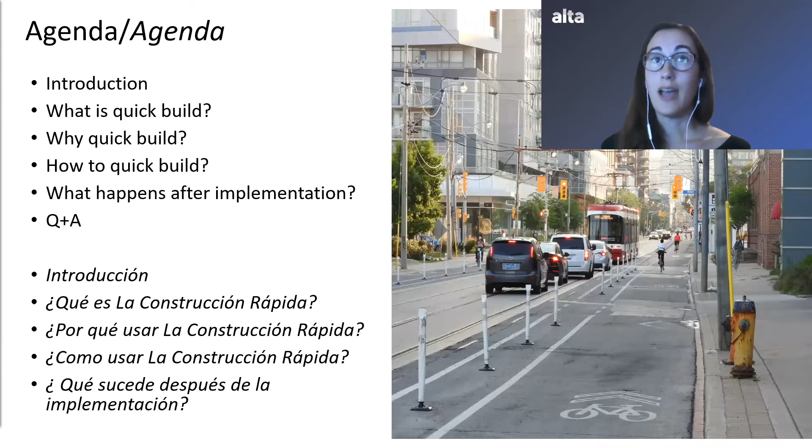Just quickly, an agenda for the meeting tonight. We'll have a quick introduction to the Quick Build Guide we'll be covering this evening. Then we'll talk about what Quick Build is, why cities are implementing it, how they're implementing it, and what happens after implementation. At the end, we'll leave some time for Q&A.

Just a brief introduction to the Quick Build Guide. ALTA Planning and Design developed this guide back in 2020, really as a response to the pandemic, when cities were looking for ways to quickly adjust their streets to create safer biking and walking routes and safe spaces for outdoor seating in the midst of the pandemic. But it's just as relevant as ever.

The Quick Build Guide includes chapters on planning, design, implementation, and maintenance of Quick Build facilities. It also includes a material selection and installation guide, as well as additional resources. There's a link here in the PowerPoint presentation. I don't know if Kristen or Devin could maybe add that to the chat so people can access the guide after this presentation.

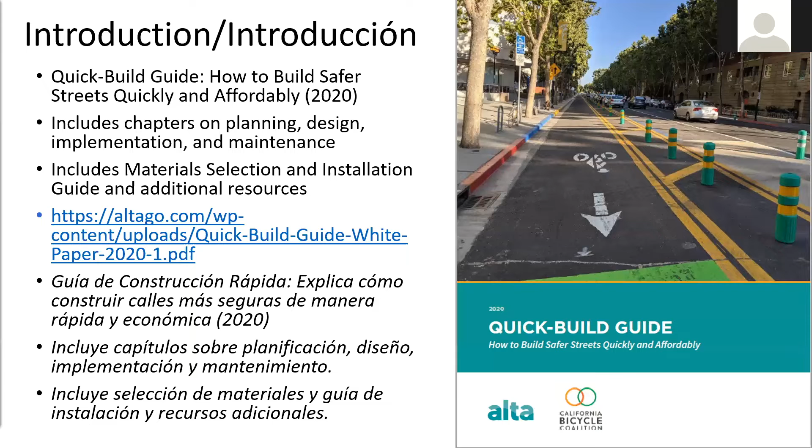So what is Quick Build? Quick Build projects install bicycle, pedestrian, or traffic safety improvements using low-cost materials that can be installed quickly. Quick Build projects are not pop-up or demonstration projects intended to be removed after just a short period of time. Once a project is accepted by the community, Quick Build projects can last for years if maintained, or they can be rebuilt using more durable materials. The key to Quick Build is about delivering projects in months rather than years.

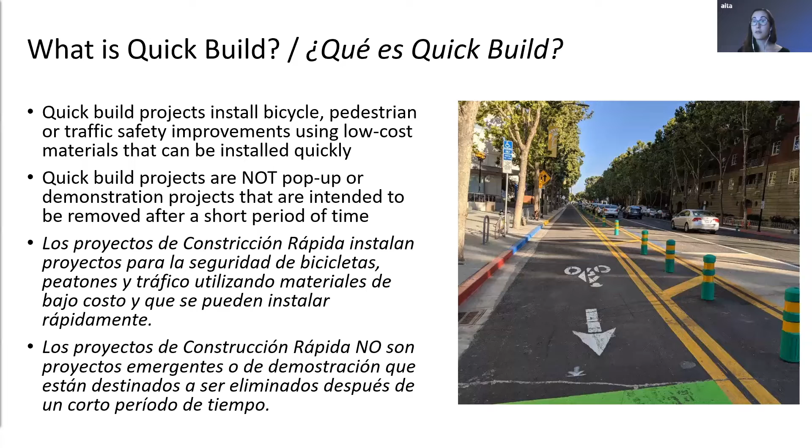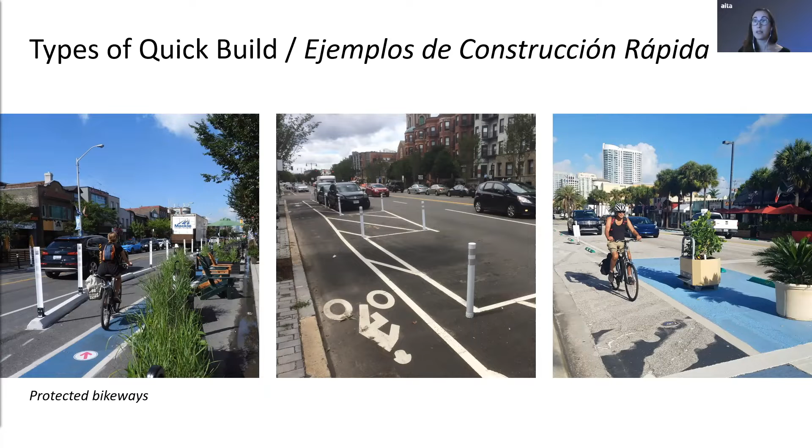There are several different types of Quick Build facilities. One is protected bikeways, which you can see in these photos here. As you can see, there's a range of materials that can be used to create these bikeways, which we'll cover a little bit later in the presentation.

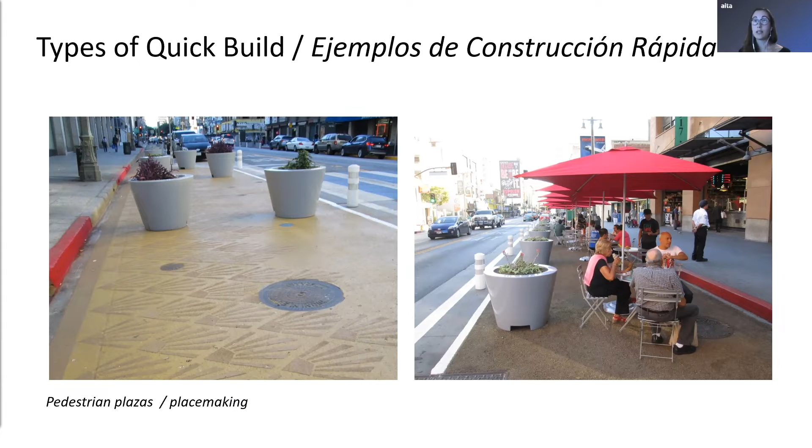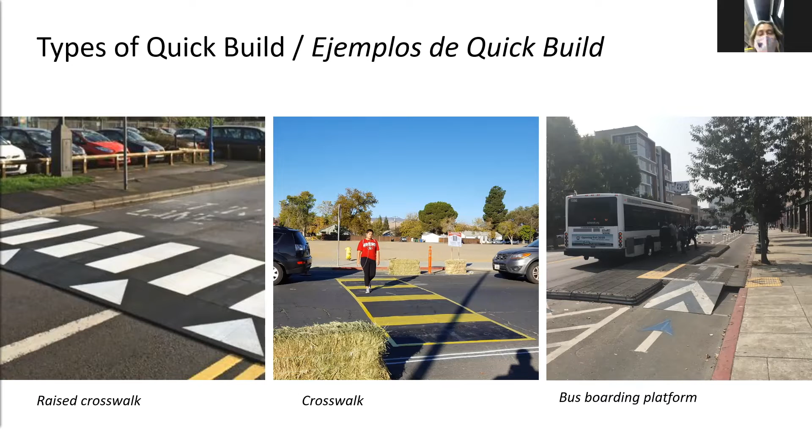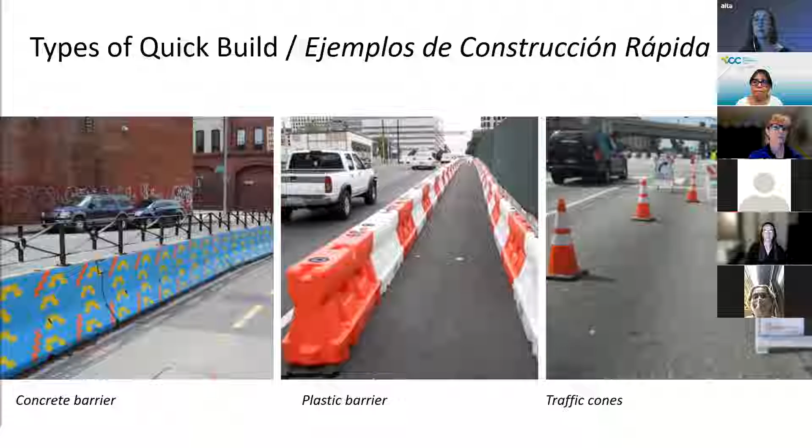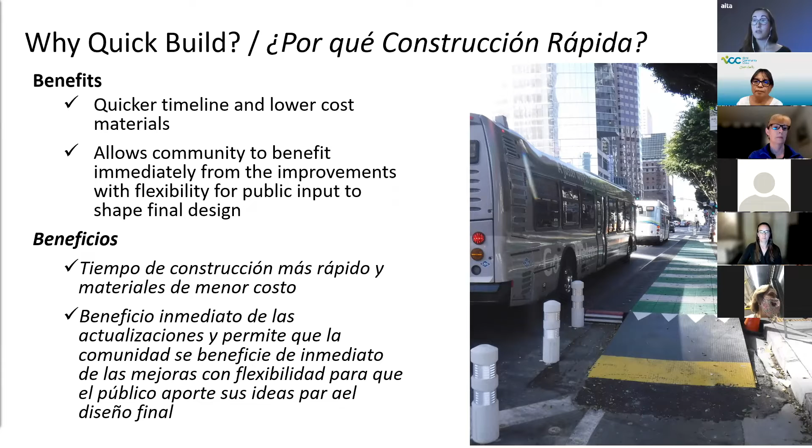So why Quick Build? Well, first and foremost, Quick Build offers a lower cost and quicker option for implementing bicycle, pedestrian, and traffic safety projects. It also offers a flexible approach to making these improvements. With Quick Build, communities get to see and adjust what works on the ground rather than in theory. Unlike concrete infrastructure, Quick Build street designs can be adapted.

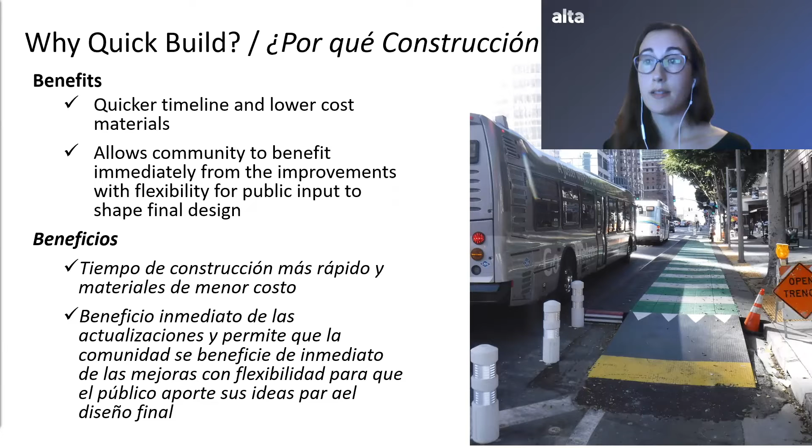During installation, the city can say, we're just trying this. An evaluation and review becomes part of the process, and community feedback on the design can become part of the eventual project if the public is supportive of making the facility permanent.

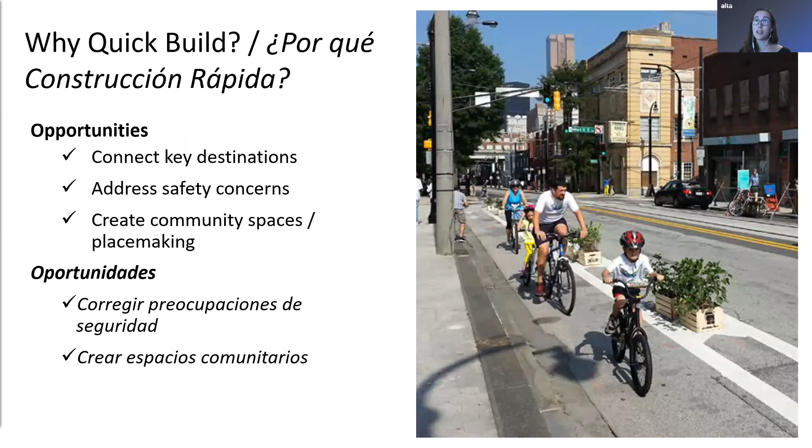Quick Build projects offer several opportunities, from making key network connections to creating new community gathering spaces. As seen before, they can be pedestrian facilities, outdoor dining spaces, or bicycle facilities, so there's really a range of different options. Often they can be used to address existing safety concerns identified in different plans using existing data, and they can also be used to connect key destinations in the city network.

So how to quick build, and we'll spend the majority of our time here. So the guide covers a number of considerations for implementing quick build projects. The first is to set and communicate project goals. So with community input, determine what the priorities are for your city. Are they safe biking and walking routes or new community gathering spaces? All of these are possible with quick build facilities.

The second is to take stock of available resources. There are likely at least some existing resources, knowledge, and labor available within the city that can contribute to various stages of a quick build project. Where possible, identify these options first and plan for how they can be used.

The third is to take advantage of predictable opportunities. So regular street maintenance provides a good opportunity to make small changes to streets. Knowing your repaving schedule so that you can take advantage of this opportunity can be great to add new crosswalks or bike lane buffers, etc., that can save both money and time.

And then finally, using existing contracts when in-house resources are limited can be really effective. From data collection to public outreach, many different tasks and skills go into the quick build projects. And if you need consultant support, where possible, using on-call contracts can help avoid a new bid solicitation process for each new project, making them easier to implement as projects come up and funding becomes available.

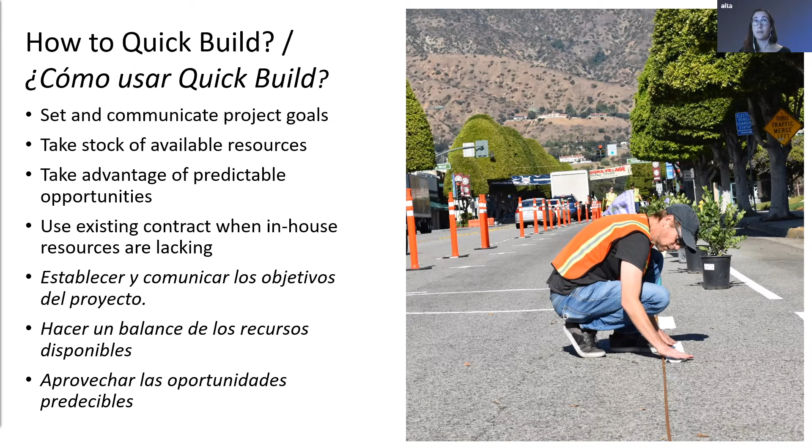So there's a number of organizational strategies that we can talk about when developing a team to implement these facilities. So the size and composition of the team will depend on the community and the scale of the project. But typically, it should include a key coordinator or project manager, different municipal staff such as transportation planners and engineers, and representatives from other departments like the fire department, if streets need to be barricaded at any time when constructing these facilities. And then of course, community leaders, including different community champions, business leaders, and representatives from community-based organizations, is critical for the success of these projects.

So community partners, as I mentioned, are critical to the success of these projects. Community partners can help identify priority projects, drive community support and interest, and communicate different project updates. Because quick build projects are designed to be interim, aspects of the design can be removed or changed based on community input. This ongoing process enables community members to help steer the planning, implementation, and evaluation of the network in the long term, particularly if there's support for making the facilities permanent.

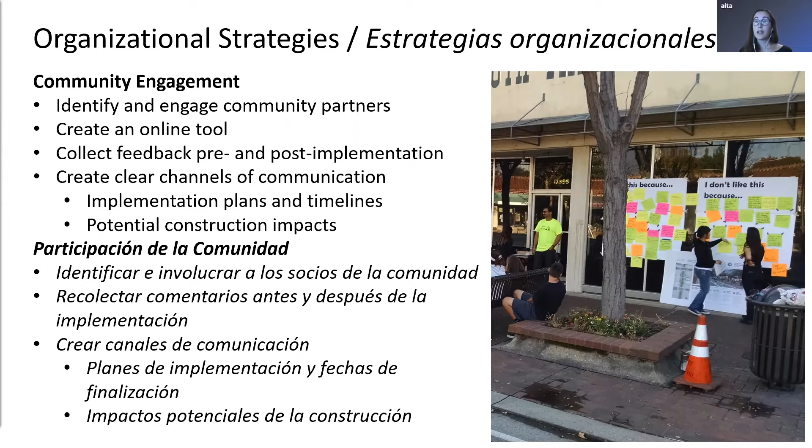So connecting key destinations, focusing on long-term planning goals that the city has, or sometimes just identifying key spot improvements that would help safety, help create safe streets.

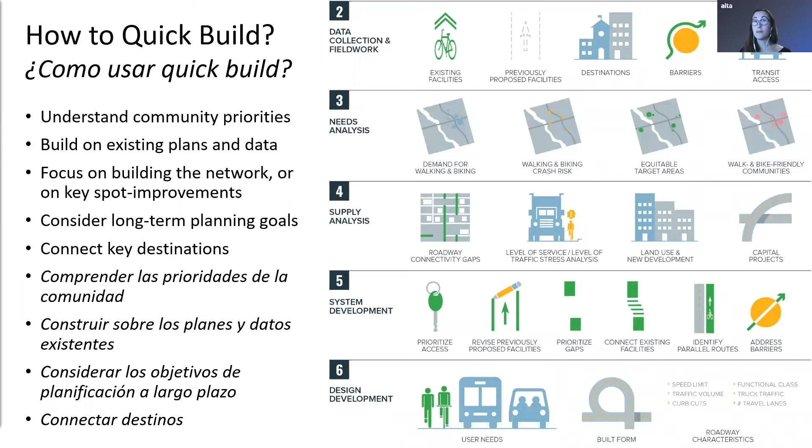So material selection. The materials are a very important part of quick build projects. They determine the duration of time a project lasts once it's constructed, and it can also influence the public's perception of the project. The materials used can range from short-term items like traffic cones, the traffic barriers.

I'm sorry, is there a way to mute? Thank you so much.

So materials can range from short-term items, so traffic cones or barriers, to more durable long-term items like concrete barriers, as you'll see here. And the type of materials can also affect the type of manpower that's needed for installation. So volunteers can be used for a majority of the materials that can be quickly applied or installed. However, any materials that need equipment to be installed will need to be professionally installed, which will bring some additional costs.

And then finally, traffic conditions can influence the type of materials that are used in quick build projects. Some areas with higher traffic may require more durable materials, whereas areas with lower traffic stress can be safely delineated with less durable materials, making them safe for people walking and biking.

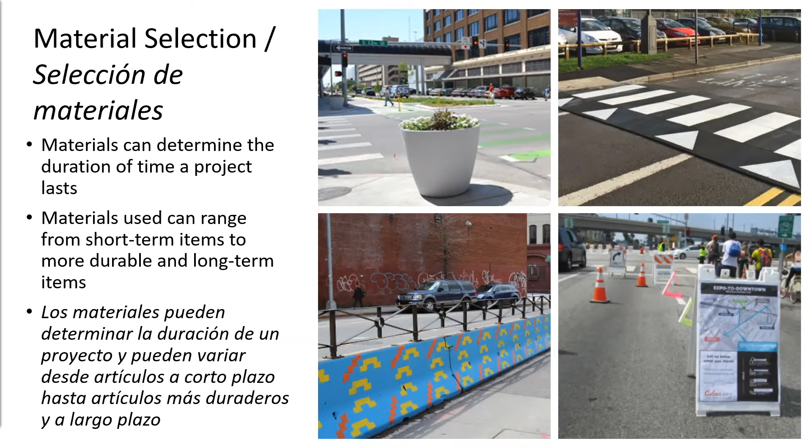And then maintenance also plays a key role in material selection. Quick build facilities are similar to permanent facilities. However, they have an advantage of quickly being adjusted based on feedback after being installed.

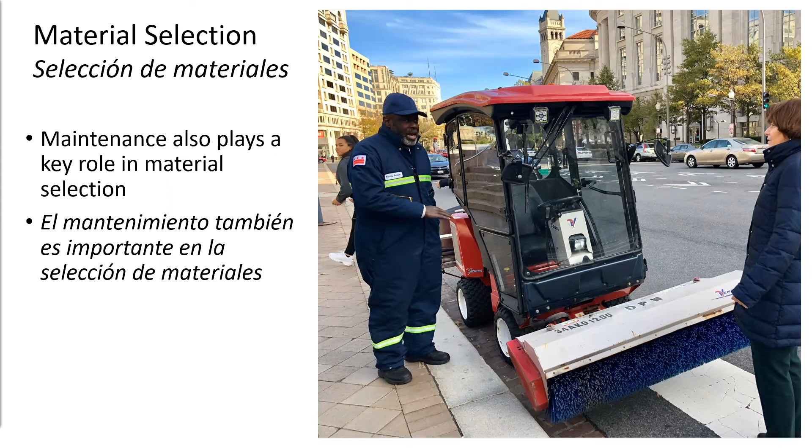Material selection also determines the number of times a material needs to be replaced or refreshed. For example, some prefabricated materials need to be replaced more often if they can be damaged, versus other more durable materials that may require less maintenance.

So for bike facilities in particular, they're usually created with a combination of paint, tape, and delineators. And there's various different types of these materials of paint and of tape that can be used that are all shown in the quick build guide. The guide covers a number of different options, as well as the various considerations that go into choosing the right type of material.

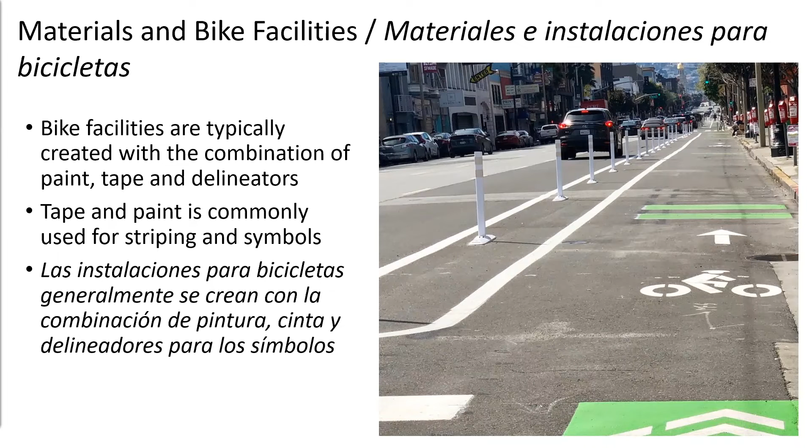And then, as you can see in the photo, delineators are there to both reinforce safety and create the buffer zone between bikes or people walking and vehicles in the street.

So shared spaces can include slow streets, shared streets, and local street bikeways. Shared space facilities typically use traffic calming measures to reduce vehicles to manageable speeds. While we're used to seeing some more permanent traffic calming interventions, there's now plenty of examples and processes for traffic calming measures that can be quickly installed.

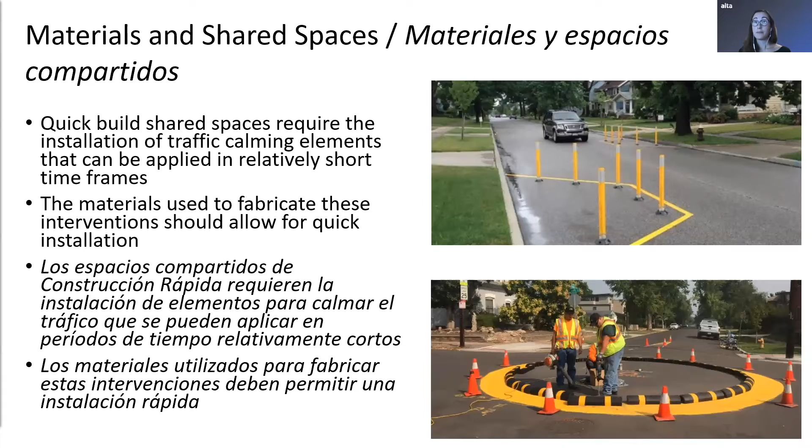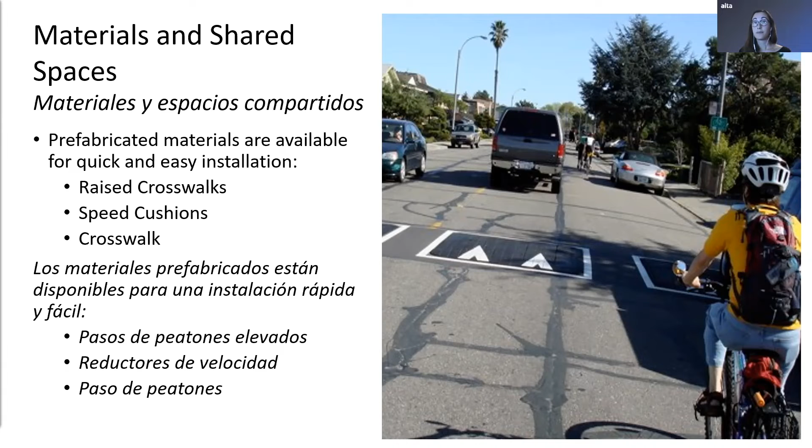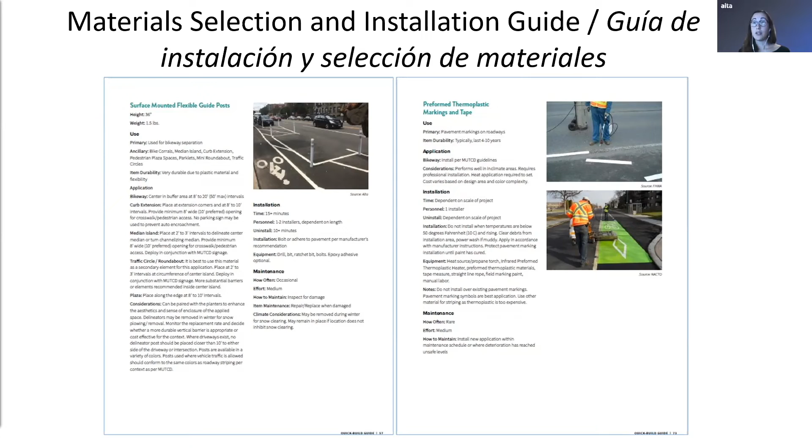So as I mentioned, there's a material selection and installation guide in the appendix of the Quick Build Guide. It provides detailed information on the use, application, installation, and maintenance of typical materials used on these projects. It also highlights the general implications for using each material listed in the guide.

And the guide also draws from a handful of successful cities in various stages across North America that show examples of different quick build methods and strategies. And one example is from the city of Toronto, which shows how cities can be resourceful in identifying quick build materials in an efficient and cost-effective way.

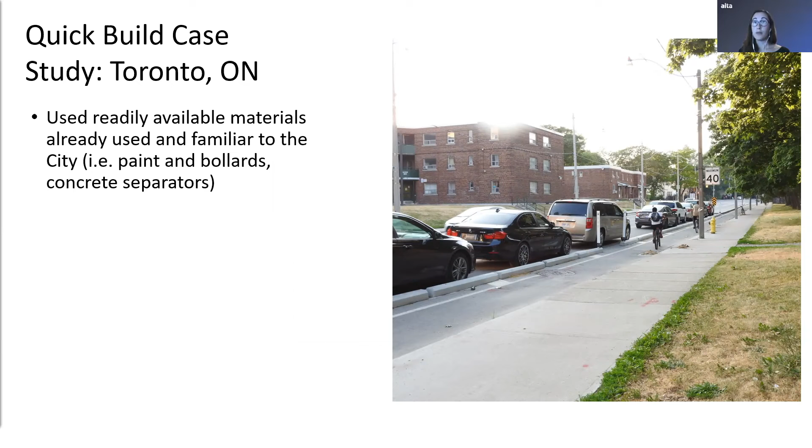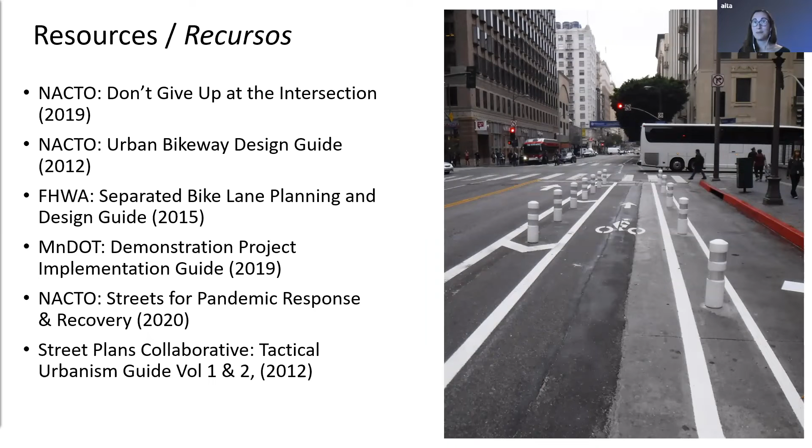So the guide includes a number of different resources for quick build designs and other considerations. There's just a few of them listed here. And if you look through the guide, you'll see them there as well. It's just additional resources and information.

Typically, design, engineering, and construction costs are also lower because of several key assumptions. Quick build facilities typically don't require the city to reconstruct the road, move the curb, move utility poles, or impact drainage patterns. So all of these really take out a significant element of design.

And then construction costs are also kept low because of how quickly the facilities can be implemented. So instead of months, the project can typically be implemented in a matter of days, which significantly reduces staffing costs. And finally, as mentioned before, most of these facilities can be implemented using volunteer or existing staff resources. And so if many materials don't require the use of a contractor, it can really save additional costs.

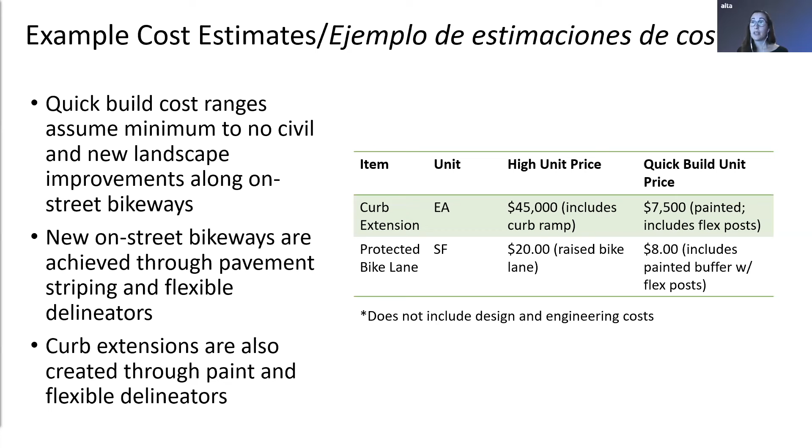So there are a number of different funding opportunities for these projects. Of course, they vary from one municipality to the next. But a couple of ideas are local and regional funds, such as the general funds, sales tax revenue, air quality management district funds, et cetera. Those are often used in several cities across the country in the case studies that we looked at in our guide. And then California's Active Transportation Program, they piloted a special quick build project in their last cycle in 2020.

And as Kristen can speak to more, they will be having their next call for projects this March with applications due in June that will also include a quick build component. And then from a private source, the AARP includes a community challenge grant that provides small grants to fund quick action projects. And those can be used to fund quick build projects. And this is just a couple of examples. There's many, many more out there. Just a few options.

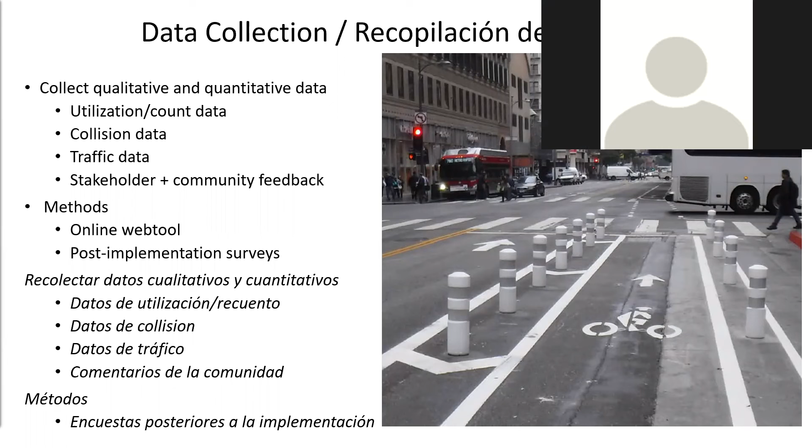So our last section here is just what happens after implementation. The data collection is a really critical piece to the quick build facilities. After the facilities are built, community members should be encouraged to provide feedback on their design and function and suggest improvements or modifications for consideration. This qualitative data can be captured using an online web tool or via online and hard copy post-implementation surveys. This really presents an opportunity for the community to shape the future of the facility, both in terms of its design and its lifespan.

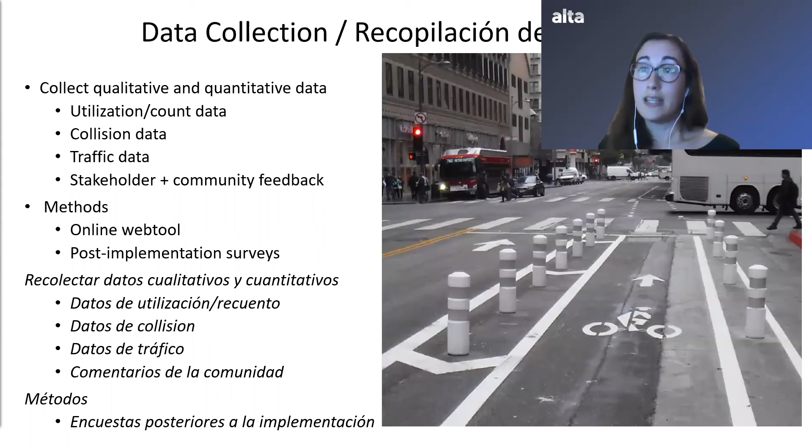Like the pre-implementation and implementation phases, community members should be encouraged to identify opportunities for new and improved facilities, which can help build out the network in a way that best meets the community's needs. There's also quantitative data collection that is really critical in these quick build facilities. So in addition to capturing qualitative data through community feedback, collecting quantitative data such as bicycle and pedestrian counts, changes to travel time, and changes to vehicle speeds can help evaluate the new facility and determine whether the improvements should be made permanent.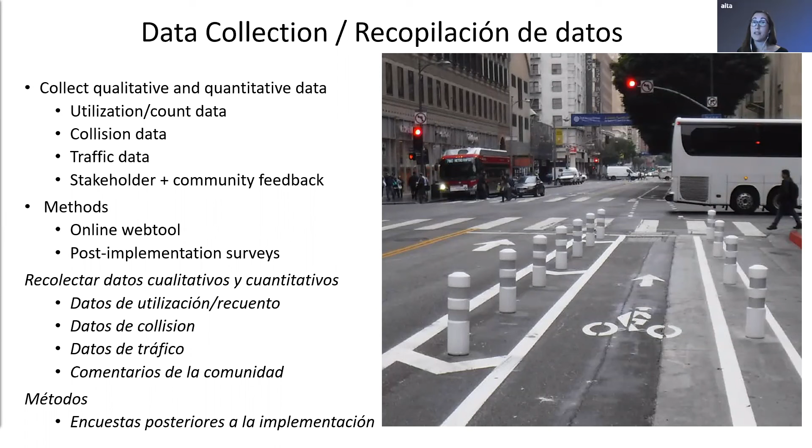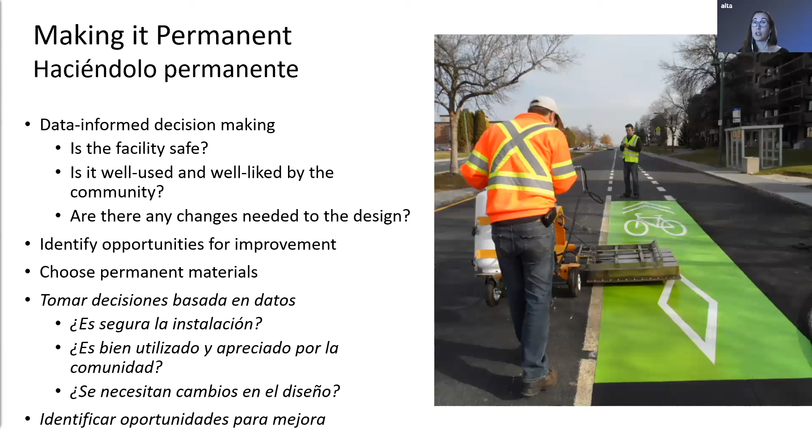The data can also help inform future decisions and priorities about what types of facilities are most needed. So this data-informed decision-making will really help determine which projects should be upgraded to more durable materials and which projects need design changes to best accommodate community needs. And some of the key questions that the community and the city can ask: Is the facility safe? Is it well used? Is it well liked by the community? And are there any changes needed to the design to make it better suit the community? And if the facility is well liked and it's working well, there's an opportunity to choose permanent materials to make it a longer term facility rather than just a quick build project.

And then finally, quick build projects offer an opportunity to implement different programming elements. So quick build can be integrated into existing safe routes to school efforts, for example, through a combination of traffic calming, expanded pedestrian space, different bicycle facilities. Quick build offers communities an opportunity to create environments that support and enable children to walk, scoot, and bike to school. And they offer an opportunity to incorporate these into existing safe routes to school efforts. So any new facilities, ways to encourage kids to use these facilities to get to school.

There's other programming opportunities to encourage people to use these spaces, and especially if they're bicycle facilities, they include free or reduced bike share programs or bicycle encouragement programs, all of which will make sure that these facilities are well used, and are also able to get the appropriate level of community feedback to determine if they should be made permanent. And with that, that is all of my slides. So would love to hear any questions you might have.